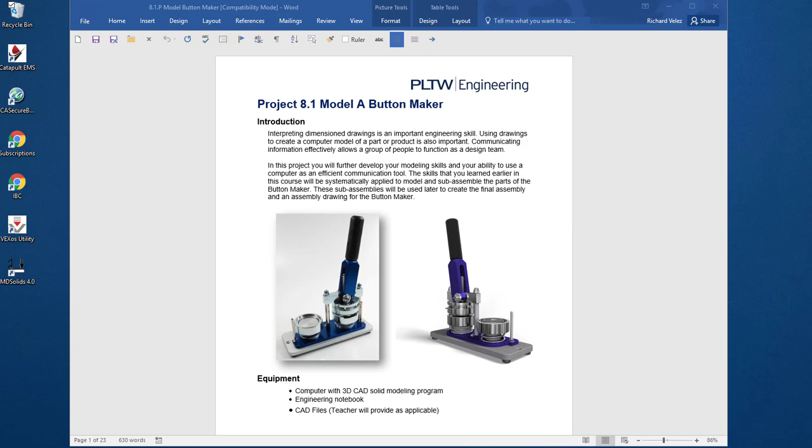I'm going to work on this part. It's part number 13, the rubber foot. It's on page 11 of the assignment.

I'm going to make this part, and we'll create this drawing.

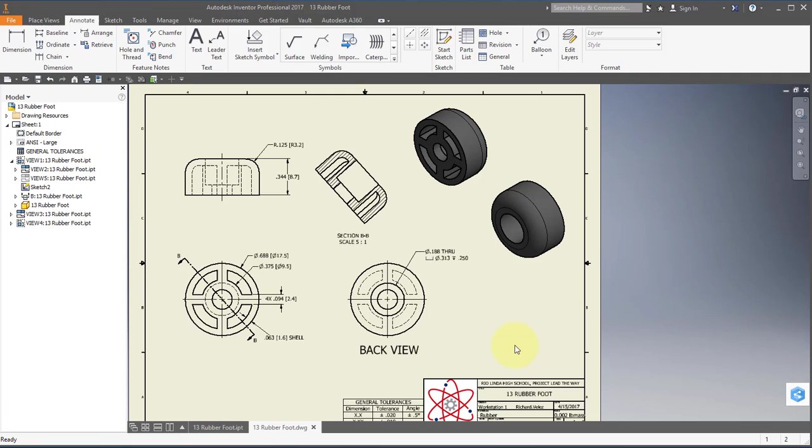Start out by creating a new part, and a new sketch on the XY plane.

Choose your circle tool. Start at the origin. Enter point 688.

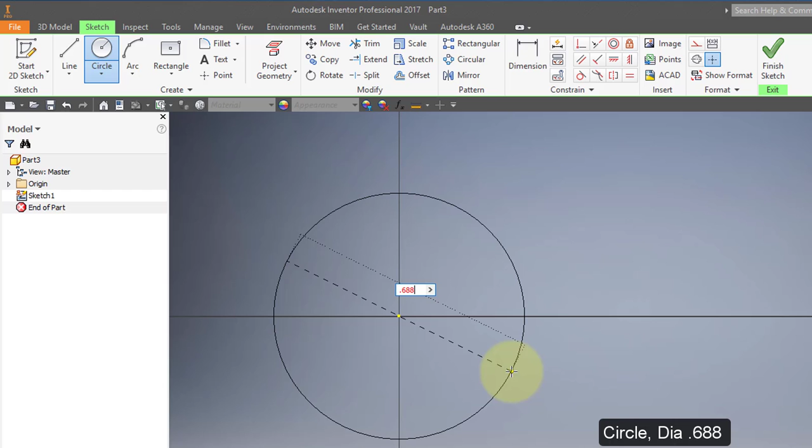Finish your sketch. Extrude. Reverse the direction and make it extrude out a distance of 0.344.

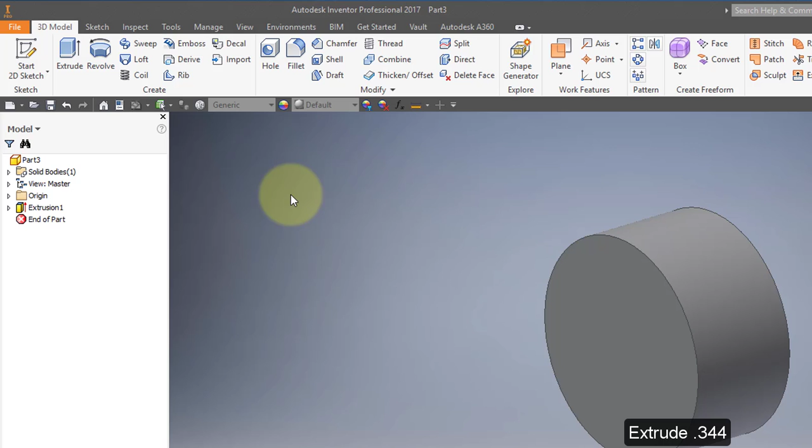Choose your fillet tool and specify a radius of 0.125, select this edge, then select OK.

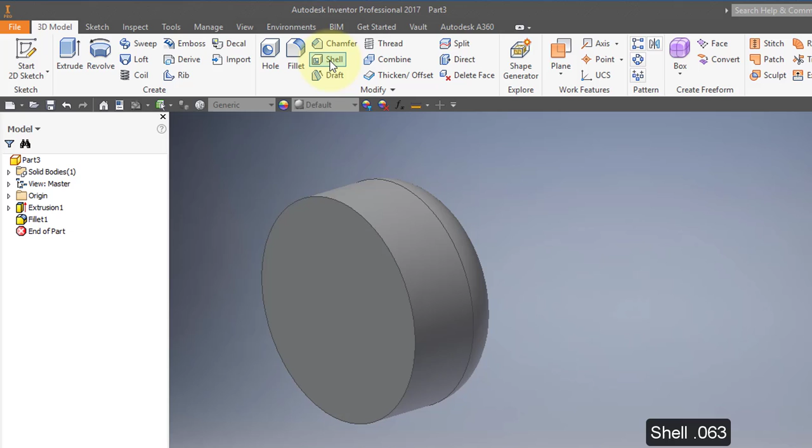Select your shell tool. Specify a shell thickness of 0.063, and specify this face. Select OK.

Notice now the part is hollowed out. It's been shelled to a wall thickness of 0.063.

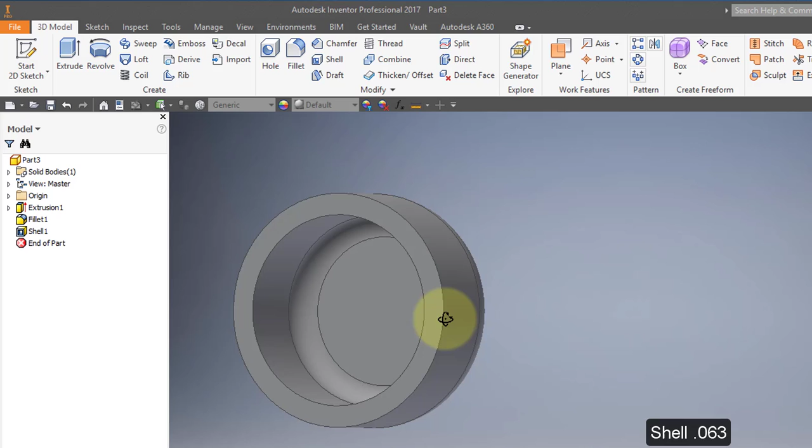I'm going to create a new sketch on this face.

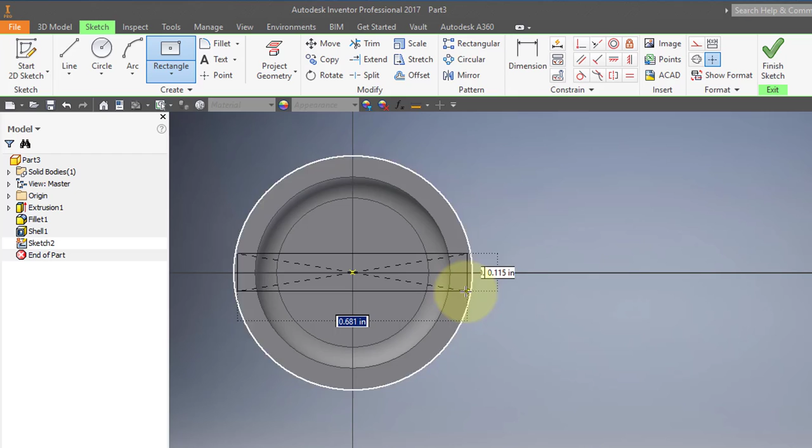I'm going to use my centered rectangle tool. Select the origin and draw a rectangle. Make that 0.688. Tab, 0.094.

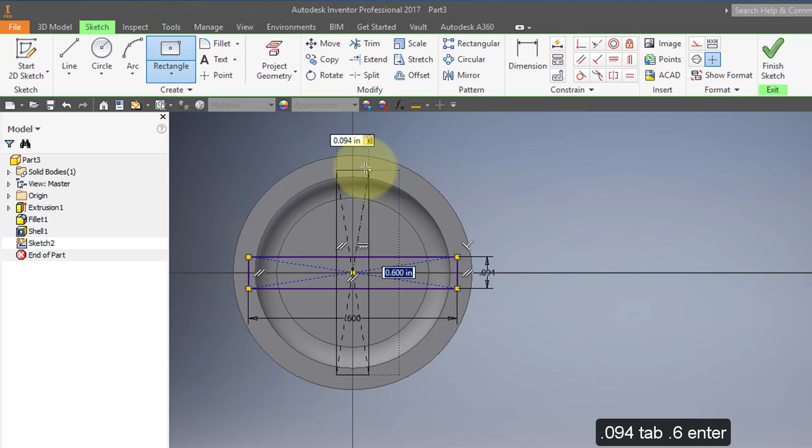Enter. And another centered rectangle at the origin. 0.094. Tab, 0.6. Enter.

Create a circle starting at the origin, 0.375. Right mouse button, cancel.

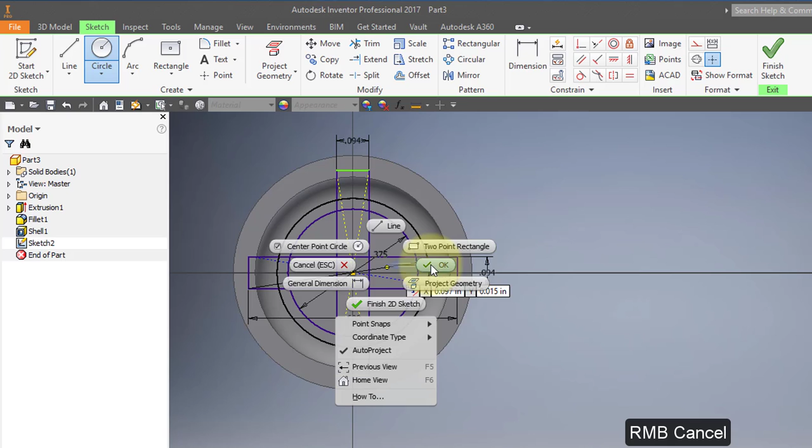Zoom in. When you erase these diagonal lines, select them and delete them using your delete key.

I'm going to use my trim tool and trim out the lines I don't need. I don't need these.

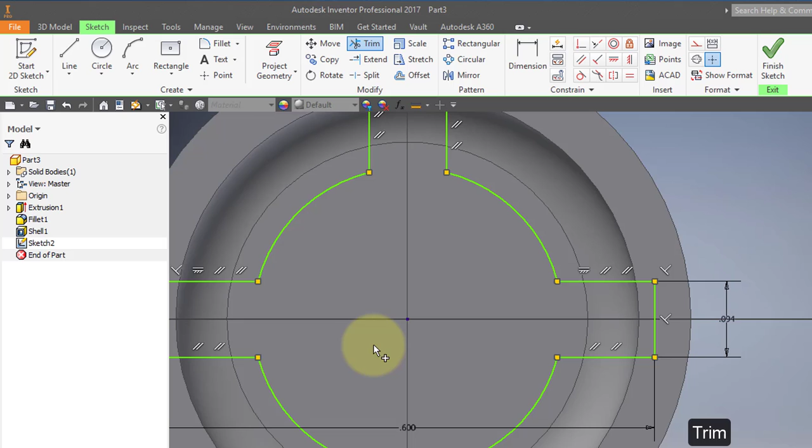So your profile should look like that. Finish your sketch.

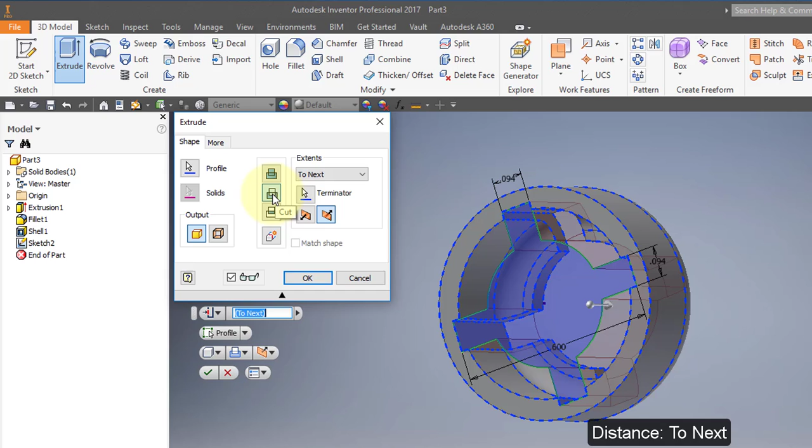I'm going to extrude. I'm going to set the distance, set that to next. This particular profile has defaulted to cut. I'm going to join, and I'm going to select OK.

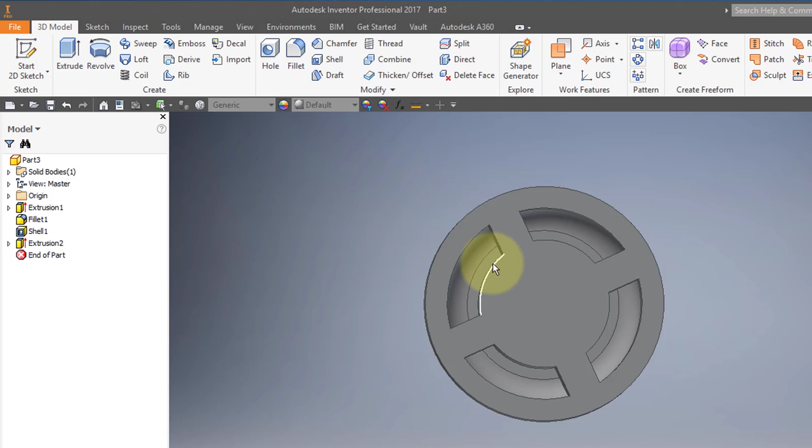So you see what I've done is I've extruded, but I didn't extrude a distance. I extruded to the next face, which in this case was a curved face, and the extrusion is taken to that face.

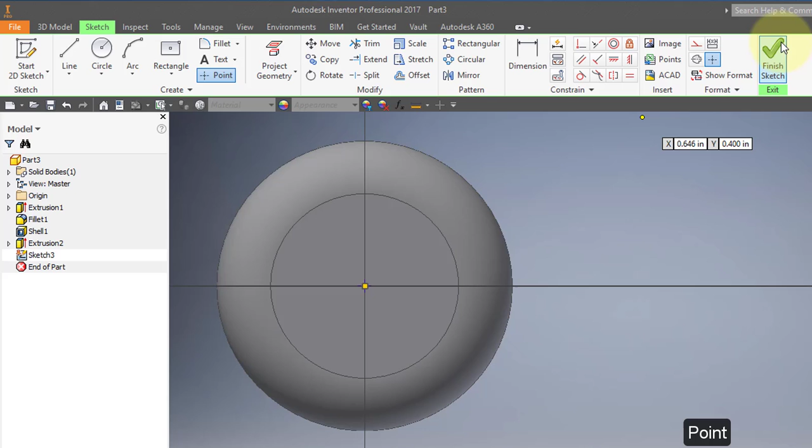I'm going to create a sketch on this back face. I'm going to use my point tool and place a point at the origin. Finish my sketch. Create a hole.

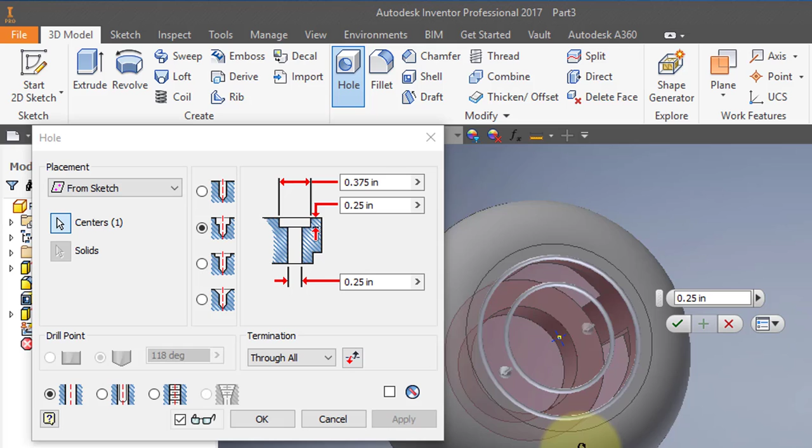It's going to go through all, and it's going to be a counterbore hole. The diameter of the counterbore is 0.313. The depth of the counterbore is 1/4 of an inch, and the diameter of the through hole is 0.188.

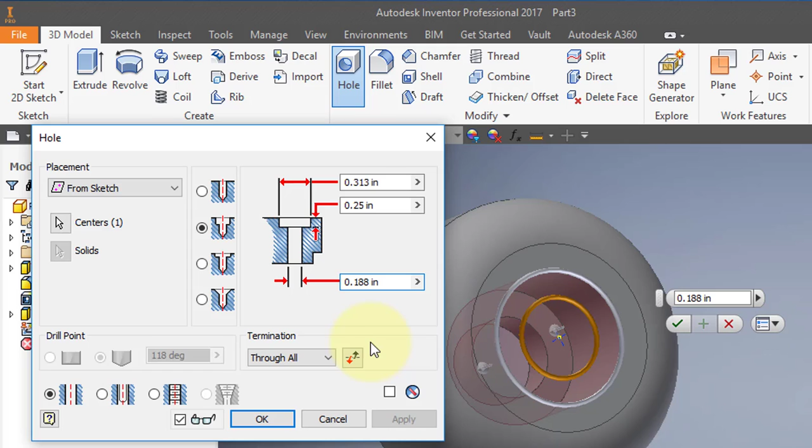Your settings should look like this.

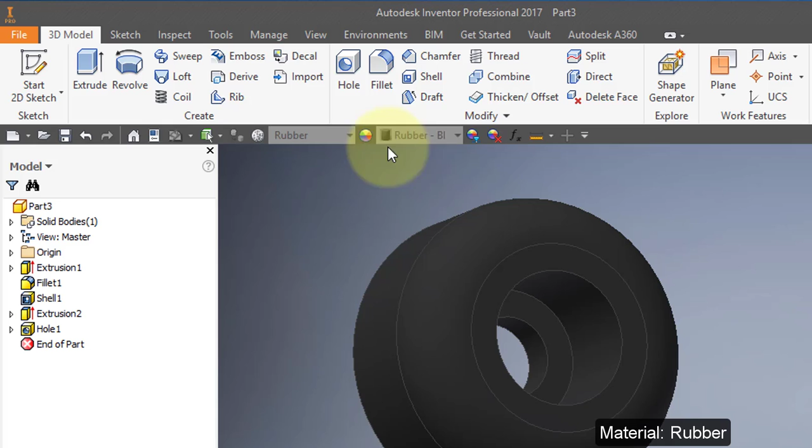I'm going to specify my material. Select rubber. I'm going to change the color. The color of the standard rubber color is very dark, and it's going to appear as a big black splotch on my drawing.

I'm going to select my adjust tool, draw a window around the part, and set the RGB settings to 100 red, 100 green, and 100 blue.

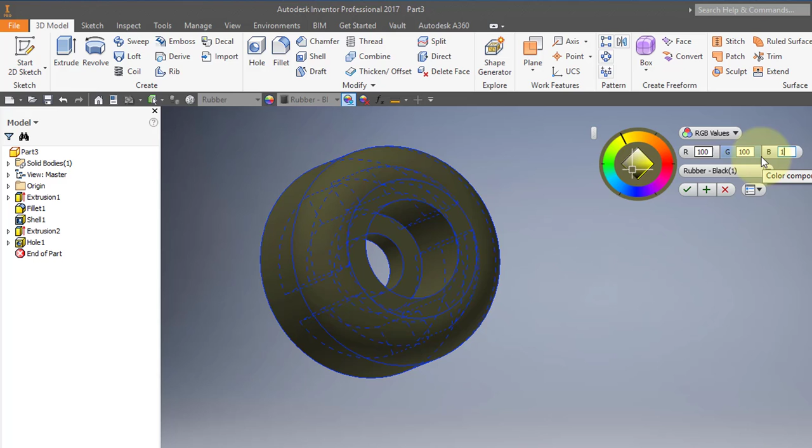Go to iProperties and Summary, and I'm going to change the title of the part to 13 rubber foot. Change the author to your name. Go to Physical, and though the material says rubber, you notice that the material properties haven't been updated.

I'm going to go ahead and select Update and OK. So when you set the material at this menu, the properties aren't updated, and you actually have to go into iProperties to update them.

Save your file, save your part, call it 13 rubber foot.

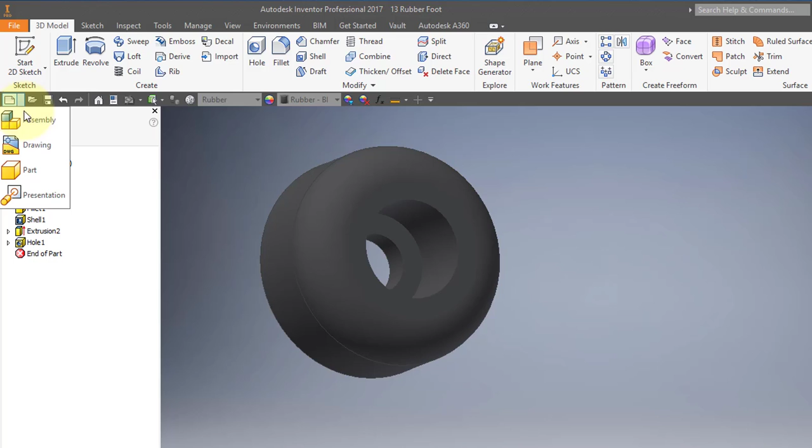Create a new drawing. Place your base view. Scale is 5:1.

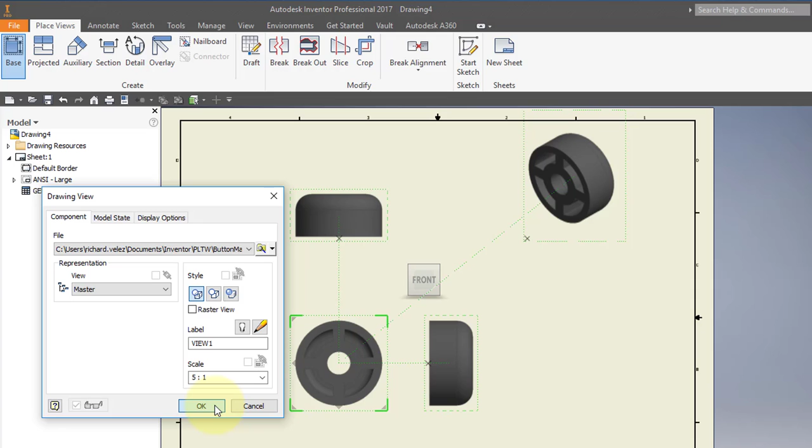Make sure that hidden line is on. The hidden line icon should be light blue. Select OK.

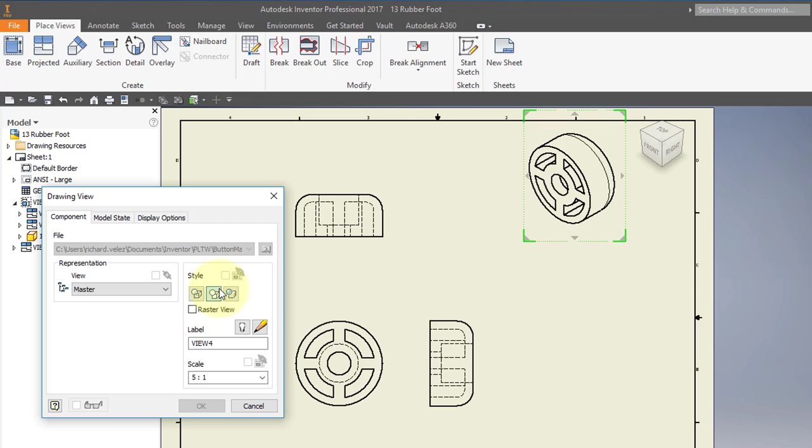Select your ISO view and turn on shaded. Select OK. I'm going to place another view, another base view.

I'm going to go around to the back and then do an ISO view of the back and select OK.

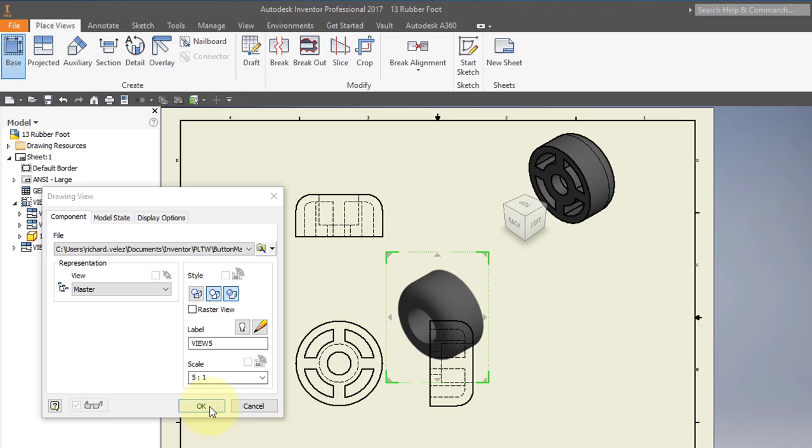Position this view here next to the front ISO view. I'm going to create another projected view.

I'm going to hover over this side view and right mouse button, projected view, and project the view here. Right mouse button, create.

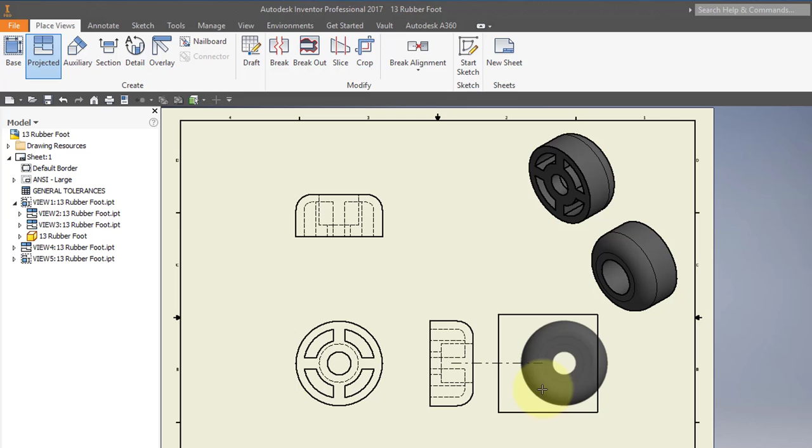I'm going to hover over my side view, and I'm going to suppress this view. And so now I have my front view, a back view, and then a top view.

The side view really wasn't necessary because the side view and the top view are identical.

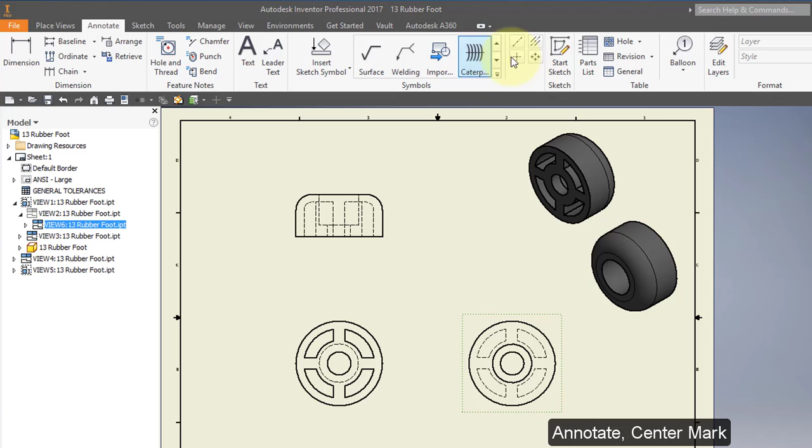Go to Annotate, let's choose my center mark tool and point to these outer diameters. Choose the centerline bisector.

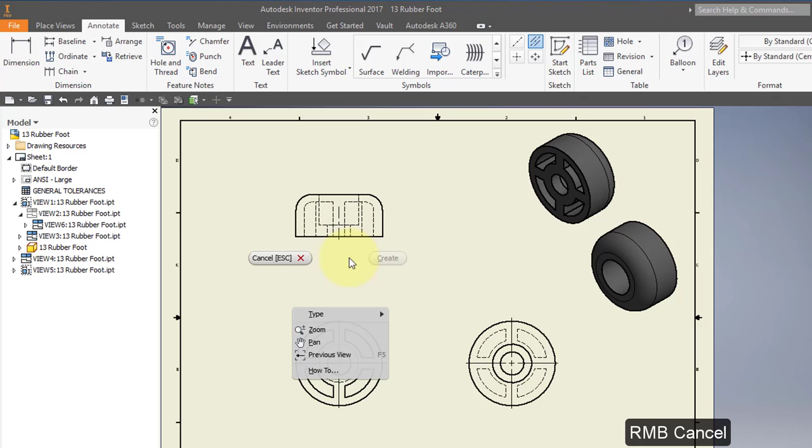Choose these midpoints. Right mouse button, cancel. Select this line and extend these out past the end of the part.

Select leader text and point to the edge of this view. Right mouse button, continue.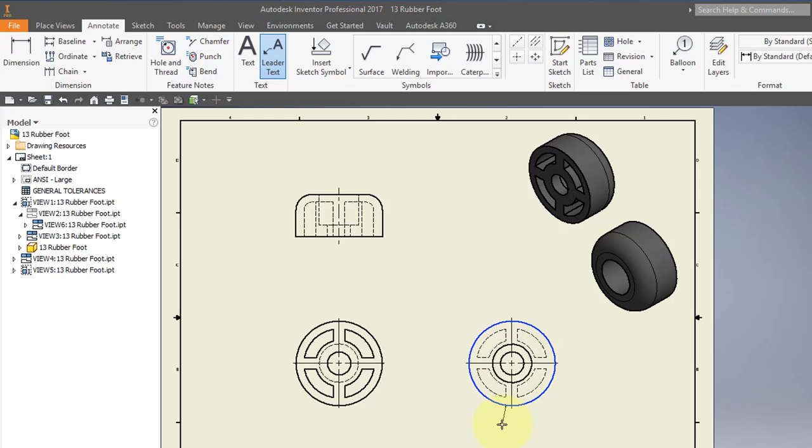Type in back view. Select the text and change the height. Type in 8 millimeters and OK.

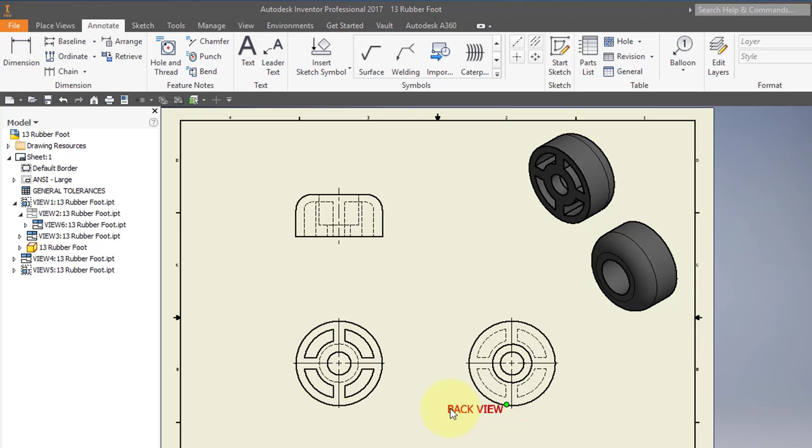And you could select this text you just created by grabbing this green dot. You can move it around. Right mouse button over the text and select Delete Leader. And though the leader is gone, you could still move the text around.

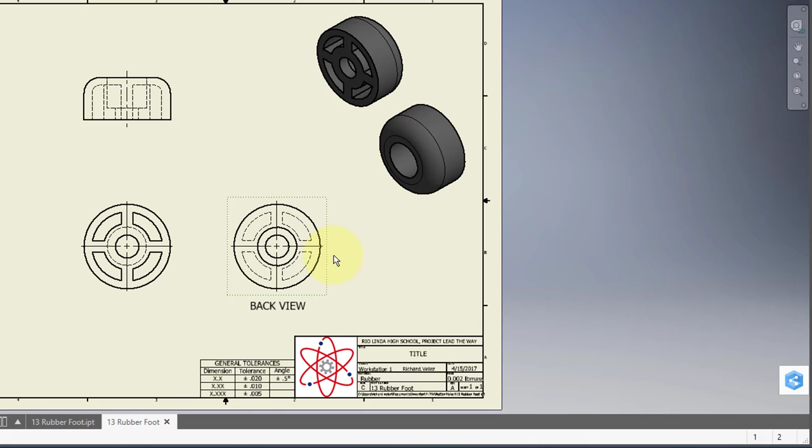So what I've done is I've tricked Inventor into relating this text to this view. So now if I move the view, the text moves with it. If I hadn't used the leader, the text would not follow the view.

I'm going to create one more view. Go to Place Views, create a section view.

I'm going to select this view, and place my cursor about here at the 45-degree angle. I'm going to go right through, make sure you go right through the center. And if you are going through, the center point will be green.

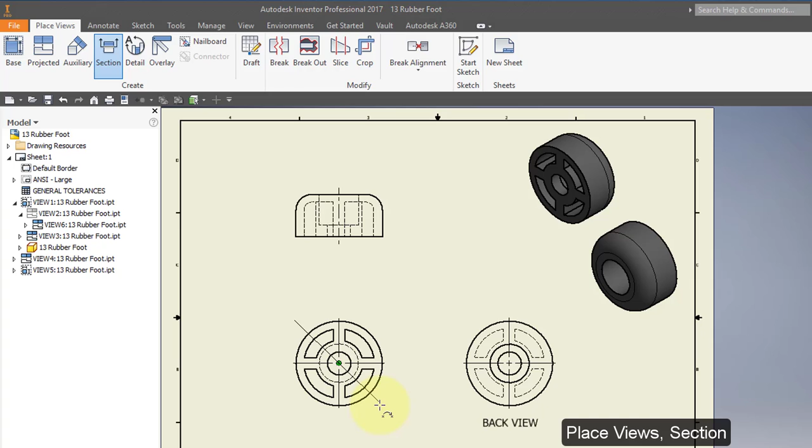Come down along and make sure you have a green dot in the center. Click about here. Move your cursor in this direction, right mouse button, continue, and place your section view about here.

Go to Annotate, Dimension.

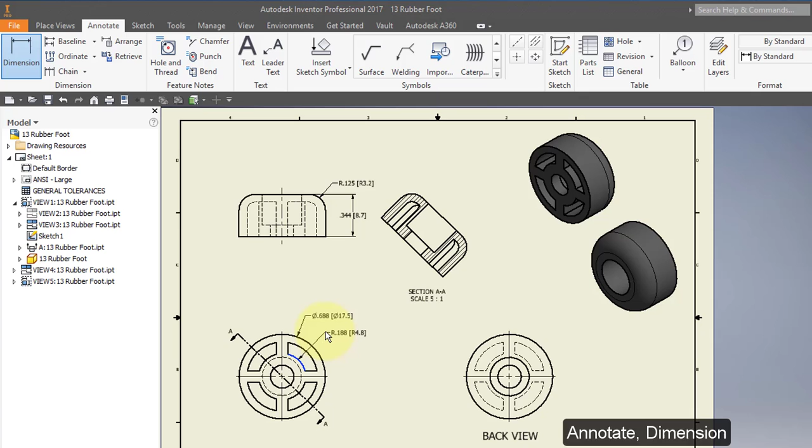Right mouse button, dimension type, choose diameter.

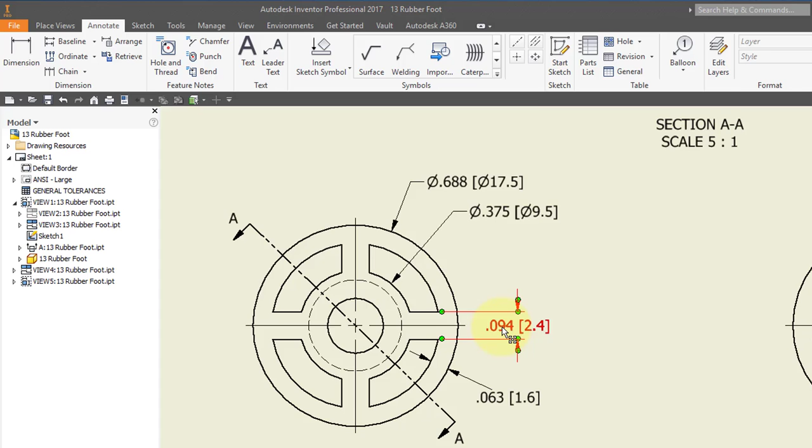Right mouse button, cancel. Select this dimension. Position your cursor at the front of the line and type in 4 capital X space.

OK. Select this dimension. And at the end, type in shell.

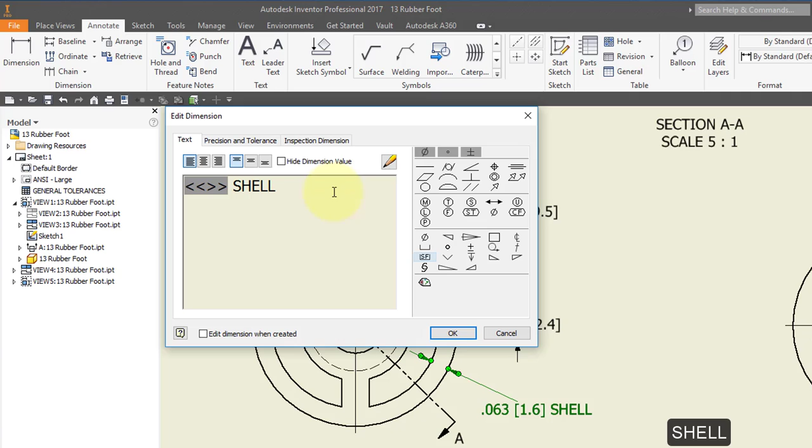Choose your hole and thread tool. Point to this hole.

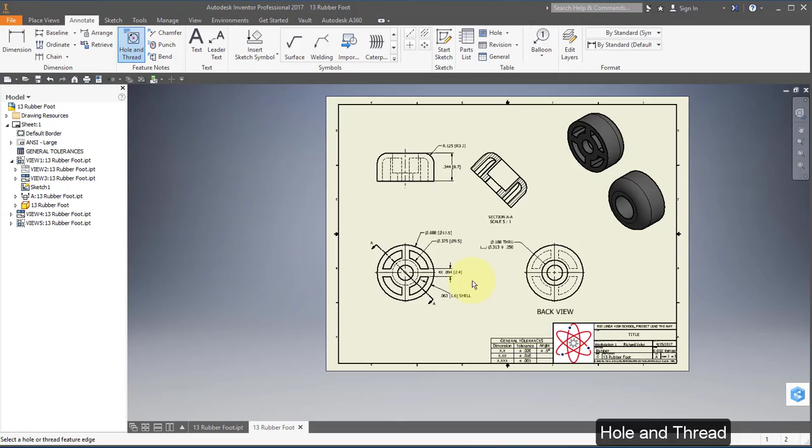Go to iProperties. Go to Summary and change the title to 13 Rubber Foot. Change the author to your name.

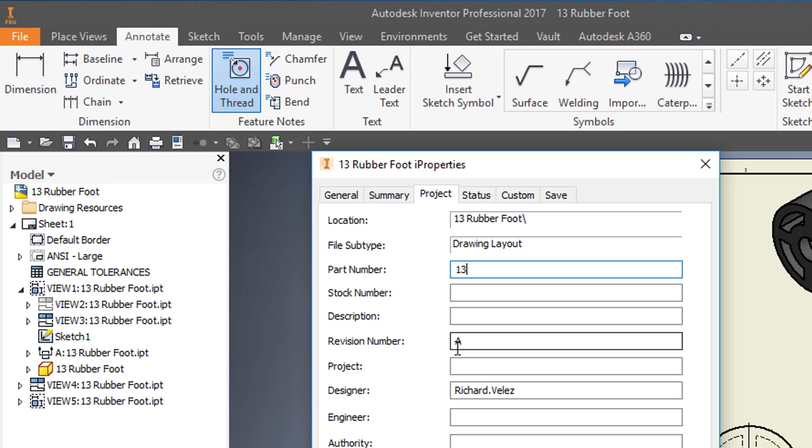Change the part number to 13. Verify that the revision says A.